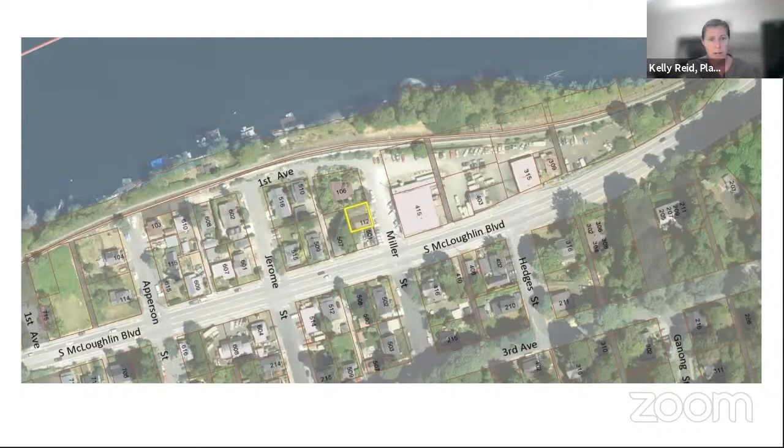112 Miller Street. This is a 5,000 square foot lot. The home plus the detached garage take up almost all of the lot coverage. It's sandwiched in between two other properties on Miller Street, close to Highway 99E. This is an older street view photo, I believe, but it shows the home being in some poor condition as far as the windows, siding, and roof.

My understanding is that the current owners purchased it and are planning to restore and fix it up. Here are a couple other photos. You can kind of see the condition of the home.

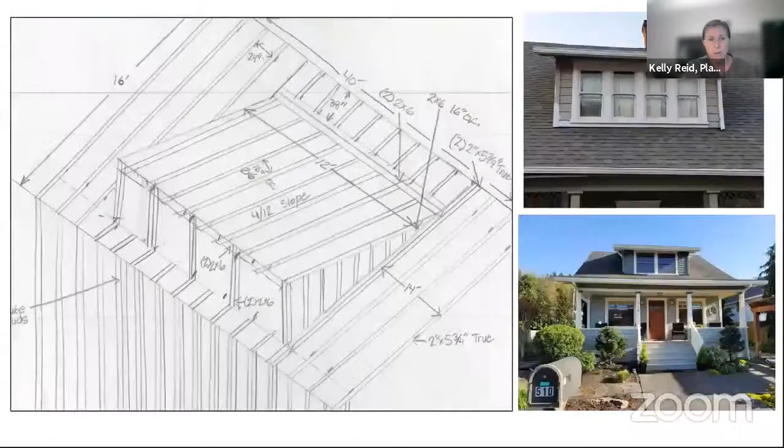The proposal includes restoration of the home, but also adding a dormer, a shed dormer, to the north facing roof. There's a drawing that was submitted, and then two example photos of precedent images of similar dormers that the applicant was hoping to replicate.

So there are a few measurements that I look at as staff to assess whether or not this dormer would be appropriate on this home, whether the design of the dormer is appropriate. Much of it is the dimensions of it, the roof pitch, and the length, distance from the edge of the roof, things like that. So we can go back to this slide as needed to discuss that if the board has any questions.

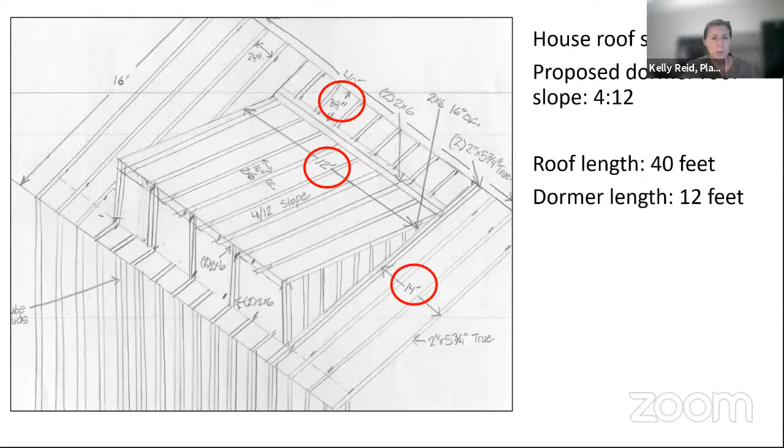This is a bungalow. I'm going to go back to the house photos. The inventory form describes this house as a bungalow. The roof pitch appears to be 6/12.

Many bungalows in Canemah and in Oregon City tend to have a side gable roof, and then on the front gable you typically see a shed dormer on the front gable facing the front. That's what the example images on this page show - those are two homes with a front facing shed dormer. So this is a little bit different for a bungalow, as it would put that shed dormer on the side.

The owner did mention in the application that upon tearing off some of the roof shingles and doing some repair work, it looked like there was evidence that something was there previously. So we don't have any historic photos of the house to show what it used to look like. I think the conjecture was perhaps there was a dormer there at one point, but we don't know.

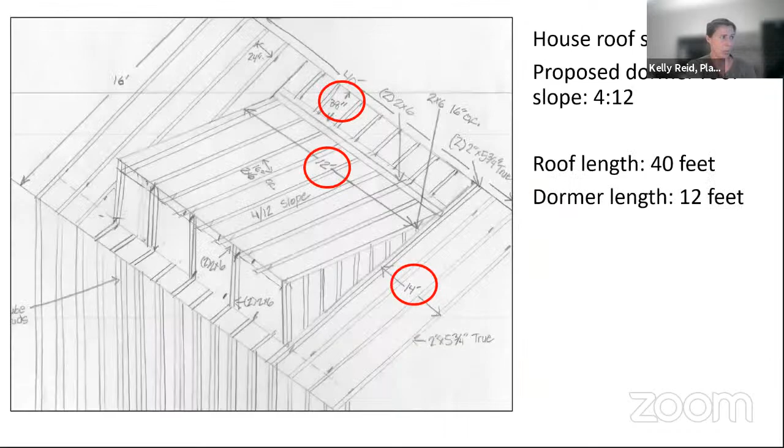Back to the design of the dormer. So it'd be 12 feet wide on the 40-foot long roof, and it would start down about 3 feet from the center ridge or peak of the existing roof on the house. I'm going to go back to one of these photos so it's maybe easier to see.

Can you all see where my mouse is pointing? Yes. Okay, so 3 feet from the roof peak here, that's where the dormer would start. 14 feet in from this edge, measured 14 feet in, it would start there.

I didn't see this at first, I actually asked the applicant over email and included the email correspondence in the agenda packet. It looks like the distance here was 2 feet from the bottom eave, but I can't be totally sure about that. The proposed dormer would have a 4/12 pitch with a bank of 4 windows, and the windows would be about a 2-to-1 proportion, similar to this photo here on top, but about 2 feet wide by 4 feet tall. I'm not sure what the dimensions of these windows are, but that's pretty large for a window in a dormer.

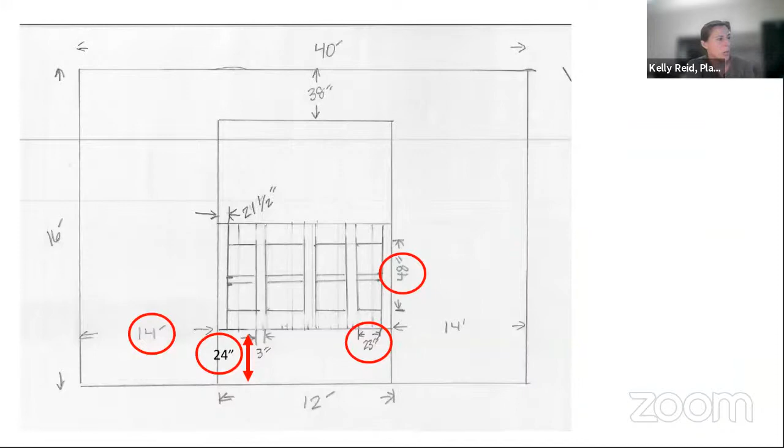Not overly large, but I think larger than a lot of shed dormers. So I added some photos that I was able to find, not from the applicant, of similar side dormers. These examples are a little bit, I think the one on the left here, the house has a similar roof pitch.

It's probably a 6/12, I'm not sure what this pitch is. These windows are, I think, square windows, and so this dormer is a lot shorter, it doesn't stick up as much. This dormer has the rectangular windows. So that is kind of a decent example, but I think this roof pitch is probably an 8.

And a couple of slightly larger shed dormers that are in Oregon City. These are both in the McLoughlin area, but just to show you kind of what it would look like. And of course, this one is on a front facing roof as well, but it is larger, having larger windows in it, just so you can get a sense of what that would look like. And these both have that bank of 4 windows.

I think it would be great to get direction from the board on whether the dormer as proposed has appropriate dimensions for a 6/12 roof pitch. I think that it being centered on the roof and set back 14 feet in, being only 12 feet wide, I think helps a lot to not make it stick out and be too large, and not fit in with the house.

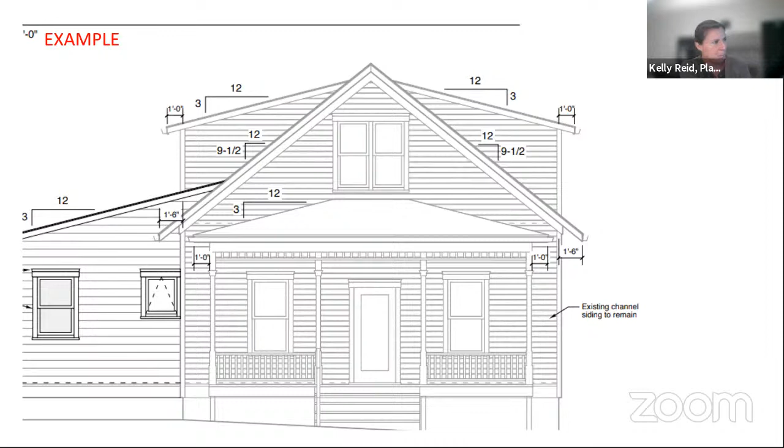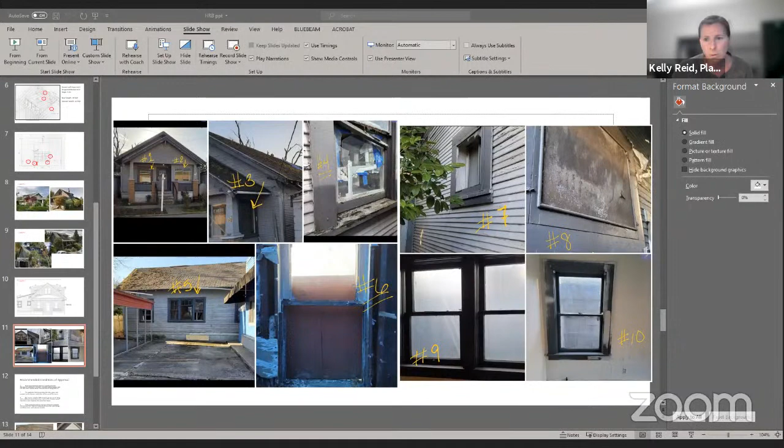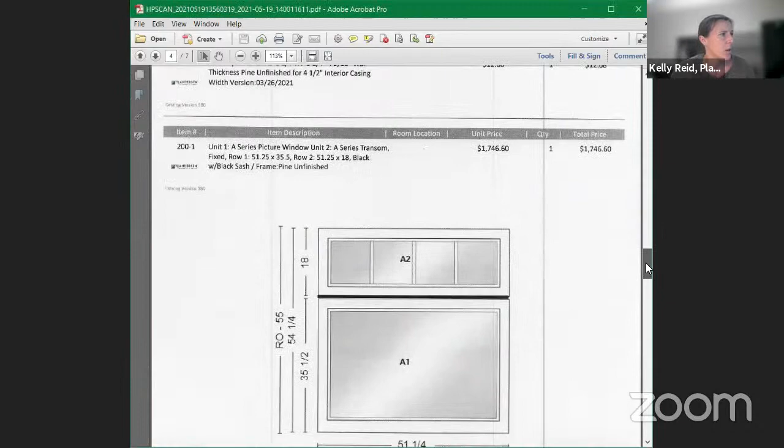Okay, I'm going to stop sharing and pull that up on the screen. I believe this is—I'll let the applicant talk more about it because they're here and can tell us more—but it looks like it does its best to kind of replicate the design.

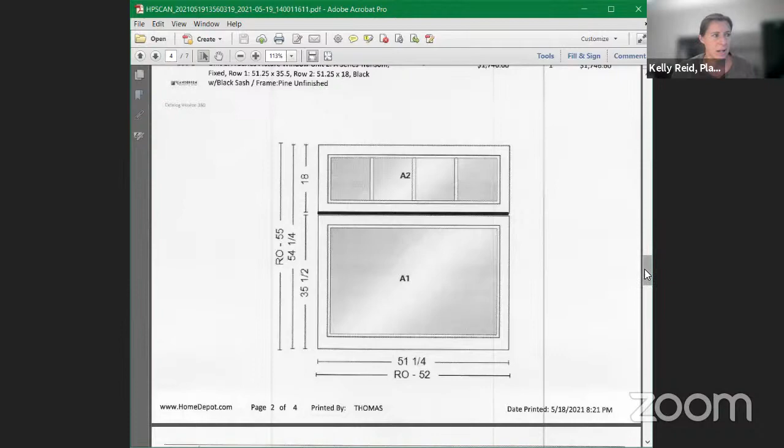I don't think there's a whole lot of detail here to describe exactly how it would replicate the design. So I have a condition of approval recommended to ensure that if these windows are replaced, the replacement windows do in fact match the original design. I'll email it to you so you can scroll through it. During the applicant's presentation, if you want me to show anything on screen in particular, just let me know.

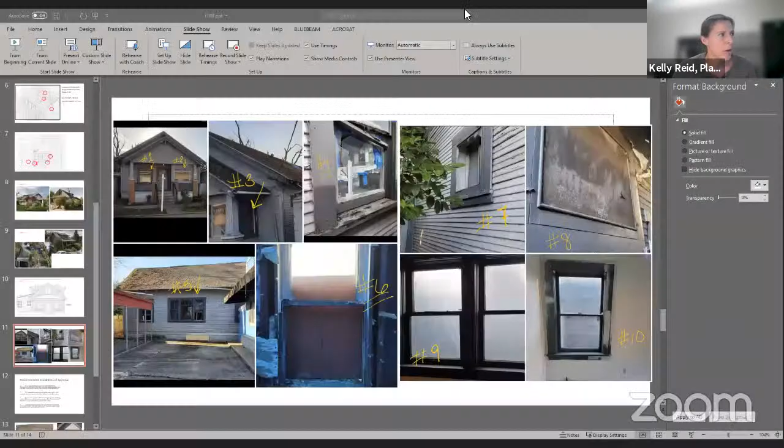So we go back to the PowerPoint. My recommended conditions of approval are, one, that any new wood windows shall use cladding of either fiberglass or aluminum to better resemble painted wood.

And the sash color should be darker than the house siding color. A caveat here: the wood windows, the Andersen 100 series in the application form, when you look it up, appear to be vinyl clad wood, so this would be a change to that. I do believe Andersen makes a product that is fiberglass-aluminum clad.

What I don't know is if that product allows for the sash color to be different from the other parts of the window and the frame. These things can be painted after you buy and install them, but I think it's worth discussing the color issue and whether the products they're using could accomplish that.

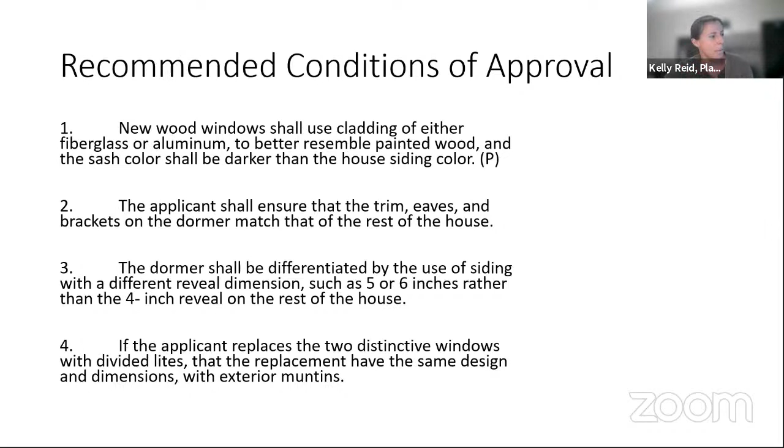These are the images of those two windows. The applicant stated in the application that window number 5 is wood and will not open due to house settling, is now crooked in the rough opening, and will be replaced. Window number 1 will be removed and replaced with a wood clad window to match.

So I'm available for any questions the board might have.

All right. Do any board members have any questions for staff? I don't at the moment. No.

Kelly, you didn't have any, so in the conditions of approval, no further direction on the dimensions of the shed dormer? I think mostly that the shed dormer dimensions are appropriate and compatible. I think it's hard to tell exactly how it will look without a real elevation drawing to scale, or some sort of rendering. It's a little bit hard to tell.

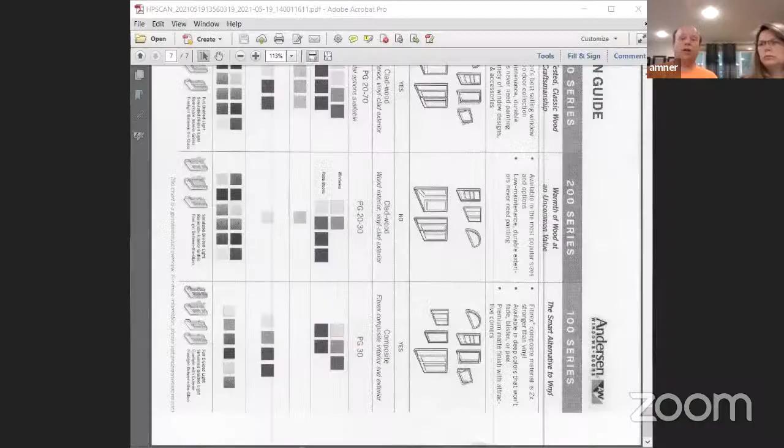But believe me, I would love to do that, because I don't know if Kelly can share the bid for the windows I'm replacing. They follow suit with everything else going on in the world right now, and it's quite the sticker shock, believe me. I would much rather be going the direction of replacing with windows as you're suggesting. Unfortunately I haven't been able to, because that front window is going to be basically $1,000 to get the replacement on it. You multiply that out times how many windows there are. This is not a cheap endeavor that I'm going into here just to try and replace windows.

Well, if we wait longer, then it's more expensive too. Yeah, and the other problem I'm running into is that right now the price of lumber, everything, just escalates so quickly. So they gave me the price of 1,000 and said they're expecting in another month it's going to have another increase. So I'm kind of under that gun, as opposed to just waiting and trying to look around.

If I could go back to the windows, Kelly, can we ensure that the windows have a sill plate and an apron below, and that they match up in exterior design or view of the windows, so that there's enough inset to maintain a similar and compatible appearance to the existing windows that they will be replacing?

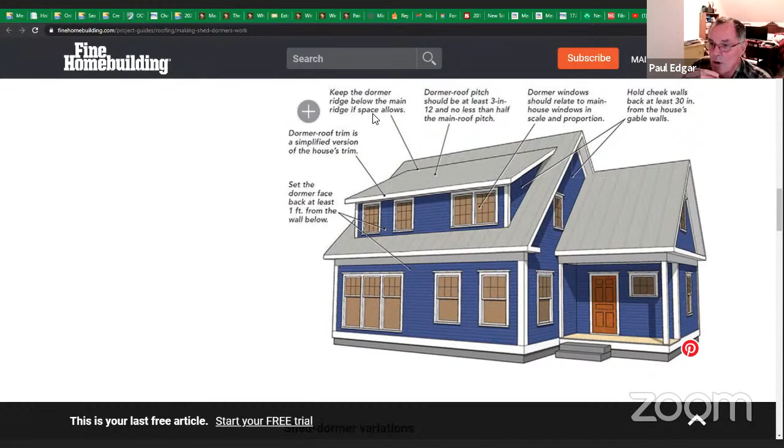No, I accept those. Okay. Paul, do you notice the one he's proposing, is that also going to maintain that the ridge of the dormer is not matching the ridge of the house? I still like it coming off the ridge of the house, I think it's a cleaner line, but I'll go along with whatever the majority says.

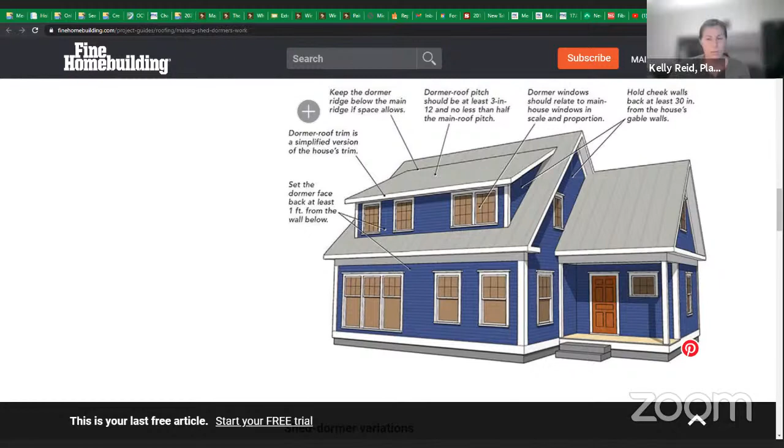All right, in that case, I guess we'll close the record and move. Hey Grant, real quick, do we need to acknowledge the letter from the M&A, from Jesse? I think that was another application. Oh, okay, I'm sorry, that was for 112. Okay, so in that case, we'll close the record and move into board deliberations.

Comments from the board members?

Well, I really want to hope that we could get windows to have this bottom sill plate and apron around these windows, so that they're set back in there to give us a type of look and feel that comes as close as we can get to historic windows.

The windows are oftentimes considered to be the eyes of a historic building, and people make assessments and judgments based upon the design and appearance of windows. Therefore, in historic buildings, they're considered to be one of the more critical elements, and doing them right, if we can, is important.

Tend to agree with that. I think the standard you set with your windows policy is the ideal, but maybe a little too grand of a vision to impose on everyone. But I think trying to replicate the existing trim profile, including the apron and sill, is ideal, so I think we could add something along those lines. Historically, when we're replacing a wood window, we need to step up one step above, because in a remodel that's kind of the goal and the guidelines. So in the case if they were repairing them, we would step back, but when we're replacing a historic wood window, we have a little more obligation to try to be compatible.

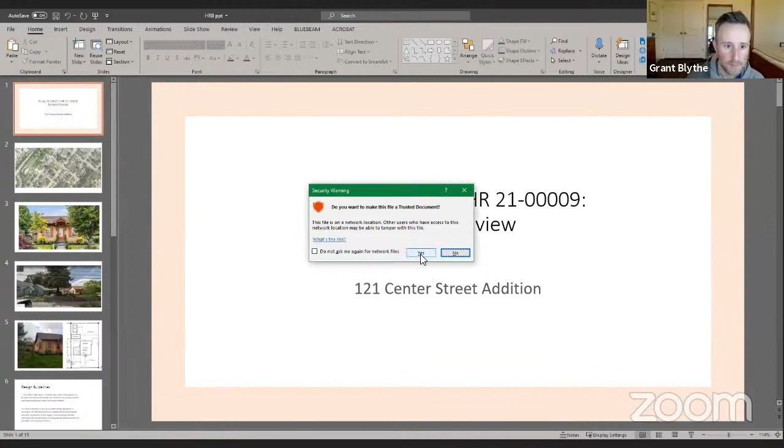So we have a project here that is an addition to a non-contributing structure in the McLaughlin Conservation District at 121 Center Street. As you all know, McLaughlin is made up of about 35% of the structures in the district that are contributing and designated.

This one is not designated, although it was built in the 20s, so it's in kind of the period of significance for McLaughlin. The reason it's not designated is because of alterations that had been made before the district was created. So in the 80s, when the district was created, this home had been altered, and therefore it was, like many homes, not specifically designated.

So we actually don't regulate what this home looks like through the Historic Review Board or through the Historic Overlay, unless an addition of over 30% is being made to the house. In this case, the project is to add 289 square feet, which amounts to 34% of the square footage of the original size of the home. So they're just over that 30% threshold, which puts them in the category of new construction, and it comes to the board.

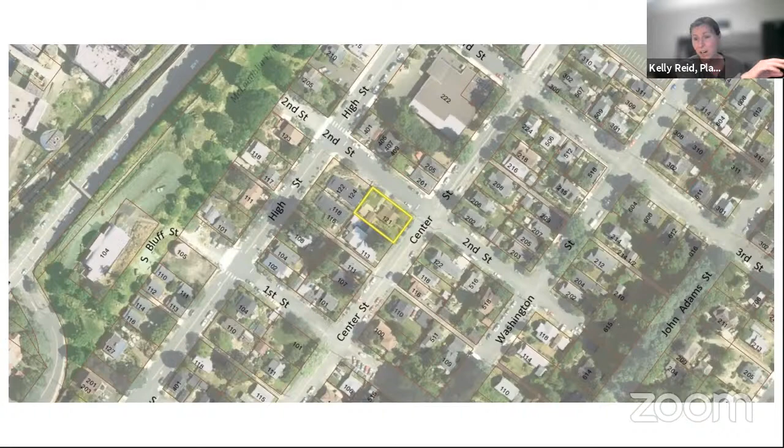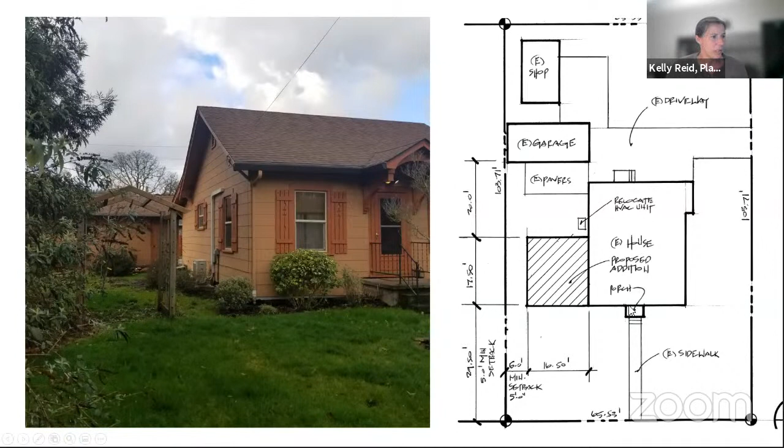The house sits on a slightly larger than typical lot, and it's well spaced from the house next door, well separated, giving lots of space for this kind of addition to be made without getting too close to any other historic resources. So the proposed addition is on the side of the house, continuing the front facade at the same level of the house, but it doesn't run the full length or depth of the existing house.

So the design guidelines — well, I guess before I go there, this is technically in the category of new construction, right, but it's an addition to an existing home. So we have design guidelines for new construction, and then we have design guidelines for alterations and additions to historic structures. Applying the design guidelines for new construction to a project like this is always a little bit awkward.

So the board may want to take that into consideration when making a decision on this. One of the guidelines, as we discussed at the last hearing for additions and alterations, is to differentiate new from old. The design guidelines for new construction don't talk about that at all, because they're written for fully new construction, a brand new house not tied to anything existing.

So I have a suggestion here, and I think the comments we received from the McLoughlin Neighborhood Association kind of speak to that as well. Because applying the new design guidelines for new construction is a little confusing and awkward, I want to point out some language in those guidelines that gives the HRB a lot of flexibility on how you apply them. On page 3 of the document, it says the guidelines describe a safe harbor to allow new construction projects to be approved easily and quickly.

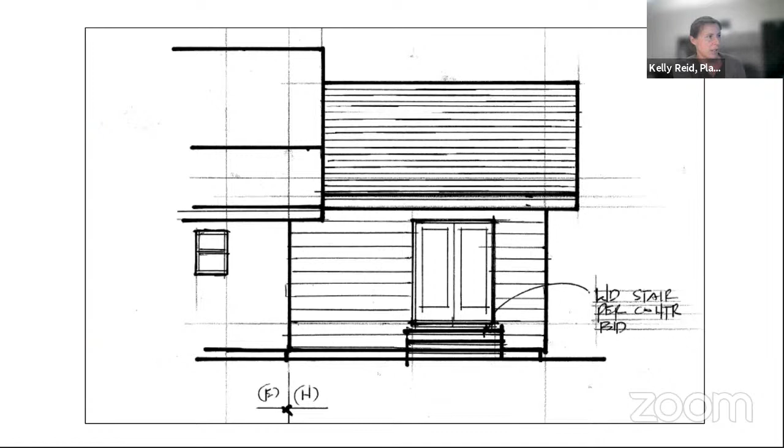And there's a rear door and a small stair on the back. So the existing siding on the home is shown here. You know, as you mentioned, it's not the original siding.

The proposal for the new addition is to try to replicate this. I think the applicant pointed out it's not going to look exactly like it, but it will be close. It's a fiber cement product, shingles with kind of a vertical texture to them, similar to the shingles that are on the house today.

The neighborhood association comments—since these were submitted today, I put them in here just to make sure that everyone has a chance to see them, since they were emailed to you this afternoon. You might not have been able to check that.

So the 2002 resurvey lists the house as historic but not contributing, as we discussed. And the McLoughlin Association suggested a few things.

Massing of the addition must be in a scale that's smaller than the main house. Proposed window should be 1/1 double hung in either fiberglass or wood, with traditional window trim, sill and apron. Rear opening should be a French door. Siding should be traditional lap or, as a last resort, fiber cement.

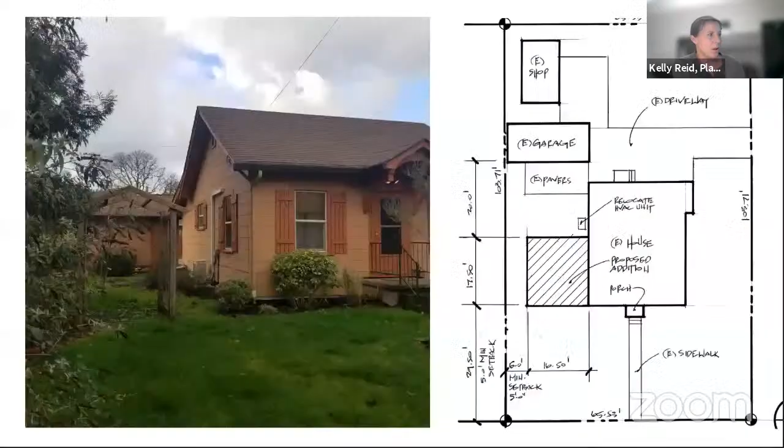These two on the side would be new windows, and they're proposing either vinyl or fiberglass, but ones that resemble the existing windows on the house.

I think HRB direction is needed not only on the shutters, but also on the windows, whether they should match or should be different from what's on the house.

So what the guideline says is that non-wood windows are acceptable if appropriate in style and matching wood in profile, shadow line, and if in suitable color and finish. An actual sample is required to be approved. In this case, the sample is the windows currently on the house that you looked at when you made your site visit.

My recommended conditions of approval, other than wanting your direction on the windows and the shutters, are to add a vertical element where the new addition begins. That could be a gutter, potentially—there might be other things you could use, but a gutter would probably be the simplest, to separate the new from the old.

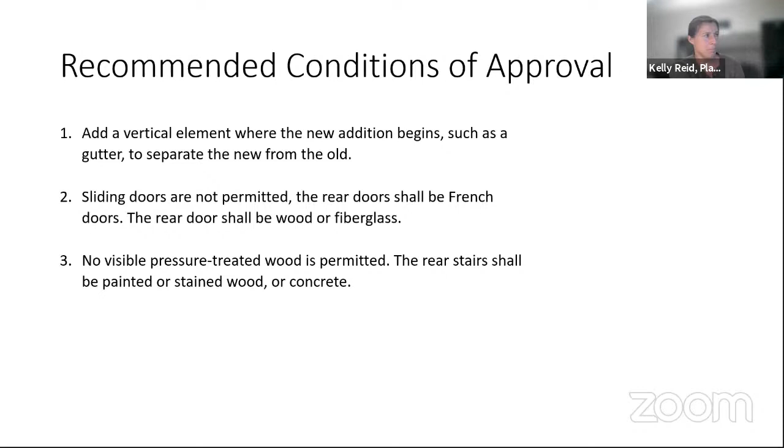Two, that any sliding doors are not permitted. The rear doors should be French doors, made of wood or fiberglass. And that no visible pressure treated wood is permitted. The rear stairs shall be painted or stained wood or concrete. I don't think we got any details on the stairs, which is why that condition's in there.

And I'll go back to the image here. You can see on the front where some sort of vertical element in the condition would be kind of right at this line here that divides the new from the old. So I will stop there and open it up for questions.

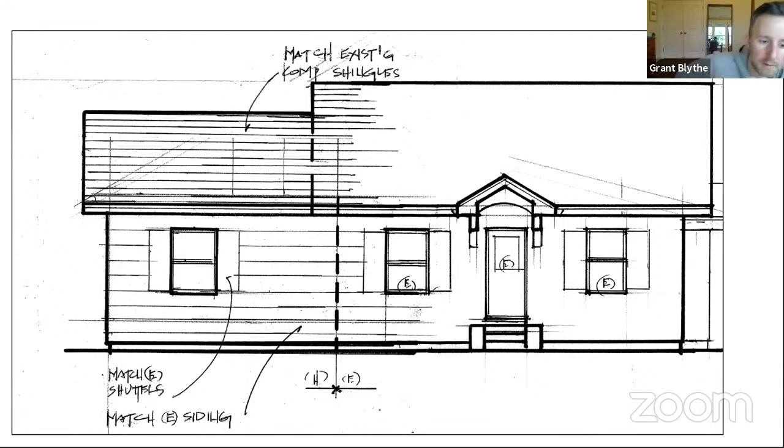All right, any questions for staff before we talk to the applicant? No questions. No question.

All right, then we'll move into public testimony. So the applicant will have up to 15 minutes, though you don't need to use it all, and then 5 minutes for neighborhood association and 3 minutes for any other individuals.

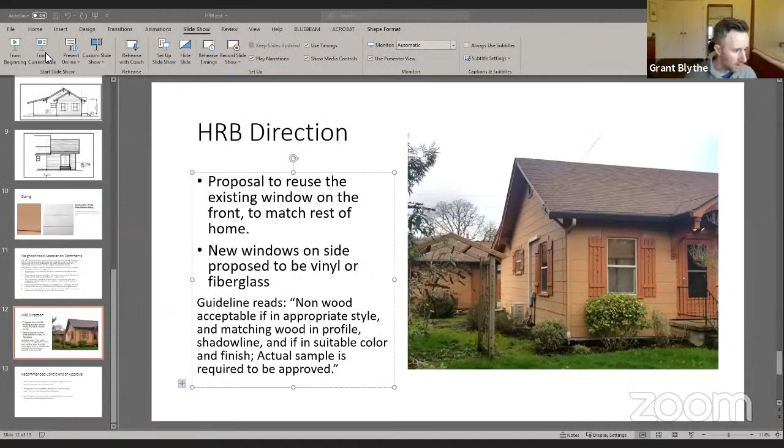Just to the west of where the addition connects to the house. Yeah, the shorter one, that's an existing kitchen window, and that is staying right there.

Okay, and then I think you heard some of the comments that the original siding was underneath. Could you speak to anything you know about the original profile, type of siding, and the condition that it's in?

Matt would have to speak to that, only because I haven't seen that piece. It looks kind of similar to what you see in the neighborhood, that tongue and groove style. But I'll tell you this, it looks like the walls were insulated after construction, because upon removing some of the shingles, I found holes all through the exterior wall where they had pumped insulation right into the wall rather than tearing the walls out, since there's no sheetrock inside the house. It's all plywood on top of tongue and groove.

I also don't know how far, if you're looking at the picture to the west where we'd like to remove the split unit. I'm thinking that addition on the back was added after, and it's probably not the same siding as what's underneath the window or in the area where we're removing or adding the addition, rather. If that made sense.

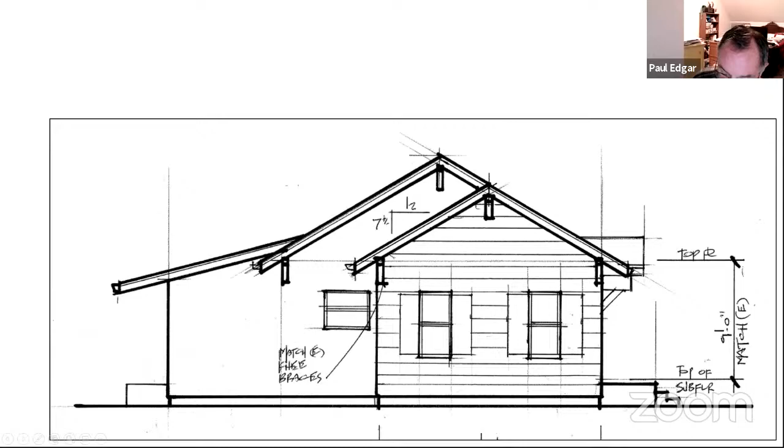I would like to move for approval with conditions, and one of the conditions would be line item 2 of the McLaughlin letter on this, where the proposed window should be a 1-to-1 double hung, either fiberglass or wood, with traditional window trim, a sill or an apron, so that they would match up.

Paul, is that for the new windows, not including the, I guess it's an aluminum window that would move to the front from the side? It's vinyl. The one that they pull out will be moved to the front, and that's based upon doing that.

And just for the record, I would try to, because I haven't touched any of the apron or the casing around the outside there, preserve that and reuse it if possible. But obviously I would match it if something went wrong.

That's helpful. But for future reference, since we've closed the record, we can't have any new testimony. Oh, sorry, can't talk. Sorry, I'll close my mouth. We have to, if we get new testimony from you, then we have to accept testimony from any other party. Fair enough, fair enough, apologies, this process.

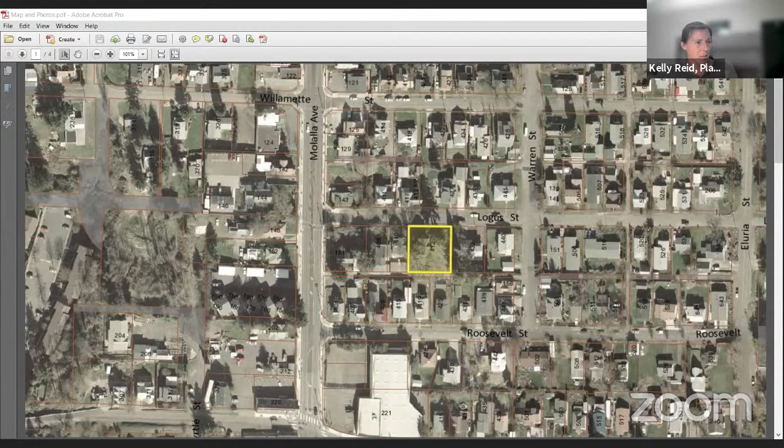There's actually a heritage tree on this property in the backyard behind the house, and there are some other mature trees as well. My understanding is that the owners want to preserve all of the large trees. I think the heritage tree is in the backyard—it's some sort of maple. Northern red oak, it's a red oak.

I don't think I'm going to be part of this. Wait, you can just talk. Yeah, okay.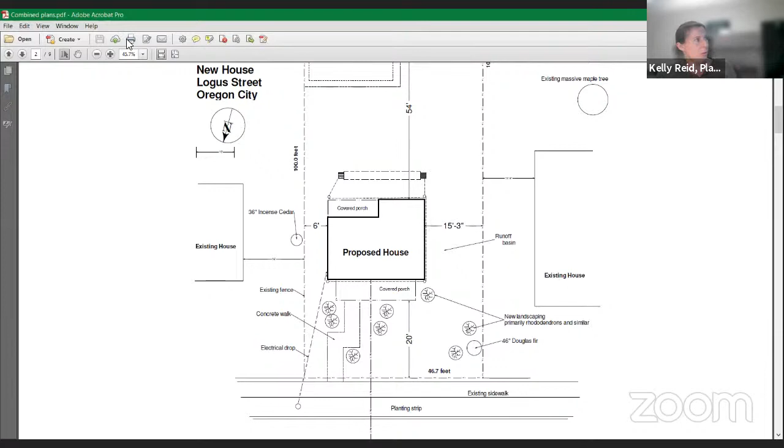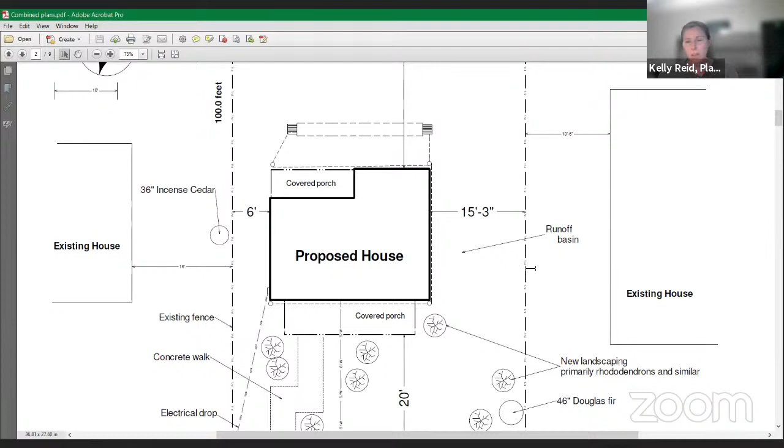So the proposed home is actually a proposed 2-story house, but it's fairly small in square footage. I think the key here is the 15-foot setback from this property line. The existing house appears to be set back 13 feet. Providing a lot of separation is a good thing, letting the historic house have that space around it and preserving its environment. I think the approach here is a really good one.

I'll just add one little thing: the scroll work detail on the front porch is probably something that might be a little too detailed. If we want to keep it simple and make the design not distract from the larger house, the scroll work might be a little too much. But that's just a comment.

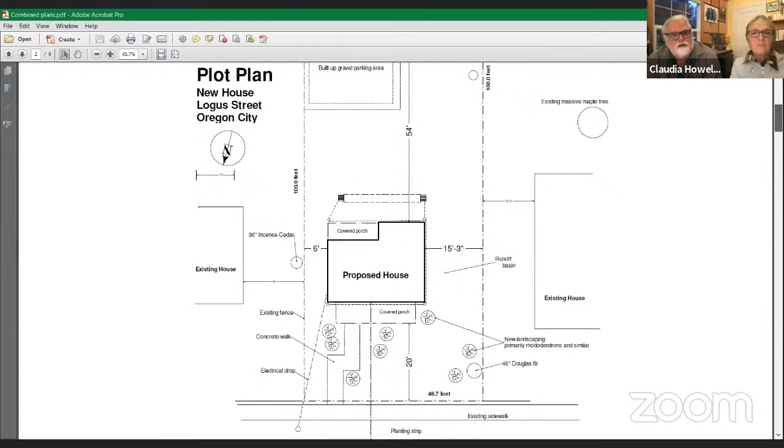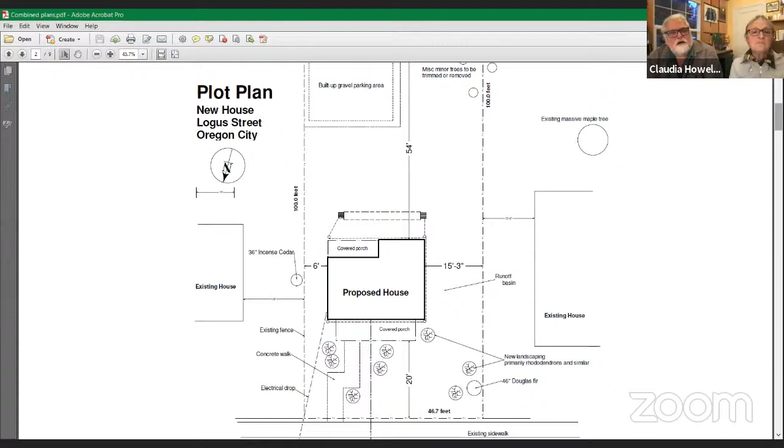We've designed the house so that the ridge is east-west, so the back of the house, the roof on the back of the house, faces due south. Claudia at some point wants to add solar panels, and the design of the house lends itself to that. Again, it's very modest. There's the view from the back. The roof pitch is 5 in 12, in all the roofs, with a small covered porch in the back. What you see there in the corner of that bay window is the dining room, and again it faces due south.

It's meant to be a passive solar feature. It has a total of 5 windows and those 3 skylights. It'll be a wonderful room to be in, absorbing a lot of sun in the winter. With solar panels on the 2nd floor, it should be able to come close to powering the house. Beyond that, it's a 1,000 square foot house. We tried to give deference to the larger, more detailed original house, and I will look forward to your comments.

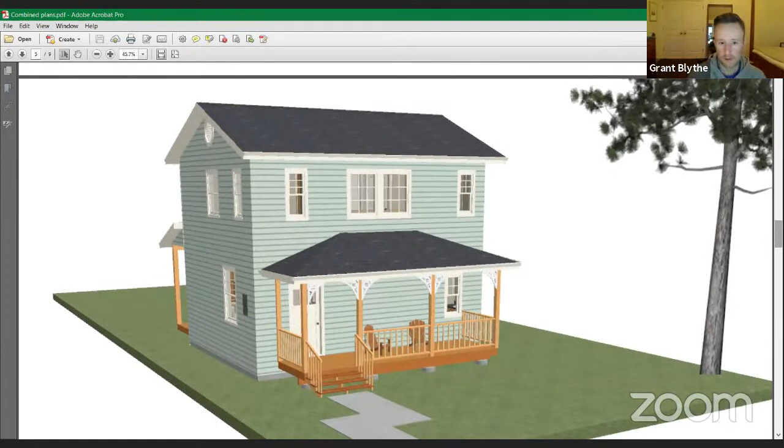Okay, very good. Any board members, if you're ready? Can I see a picture of the porch that's on the original house, the front porch? If we could bring that up.

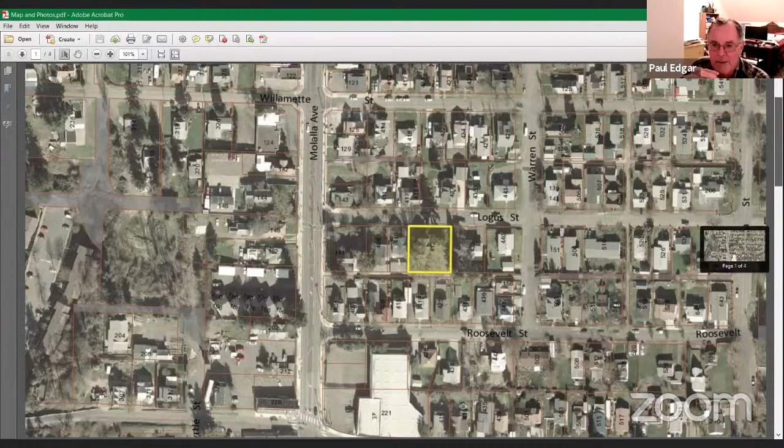I'm just interested in the roof design of the porch, after looking at the roof design on the back of the house. I'm just... it's cantilevered, sort of in there. It extends over the porch. The whole house does.

That's slightly difficult to do structurally nowadays. Shear transfer and so forth becomes problematic in that. And frankly, Claudia doesn't want the room, I mean, she doesn't.

This is backwards to what you normally see. She wants a small house. Probably what you're used to seeing is people want big houses. No, I was just trying...

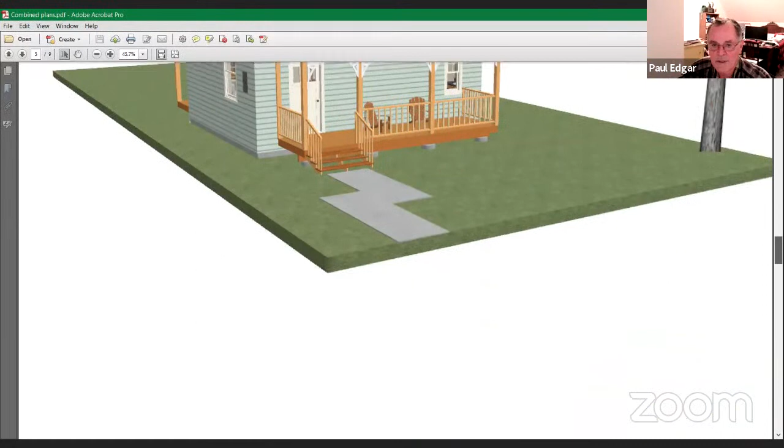If on the back of the house you have a flat one without hips on it, I was trying to think if on the front of the house, if that was without hips, how it would look, kind of matching up the front roof design to the back roof design over the front porch. Well, I think the front porch with the hips is more historically appropriate, more accurate. Yeah, see, it's held in from the side a couple of feet.

There's some deference—you'll never see the roof in the back from the street. There is an alleyway behind this, but once fences and landscaping are in, with the house to the left and so forth, you'll never see both elevations from the street. So I think both elevations are somewhat isolated. They need to relate, of course, but they don't have to be the same elevation because you can't see them both.

The back of the house is somewhat more modern. It's trying to take advantage of the sun, solar access, and so on. The front of the house is much more in keeping with the historic neighborhood, the historic character.

I have a question about that, because this is very folk Victorian to me. The original house is more of a craftsman house, so why did you decide to go with a completely different historical style? It matches the rest of the neighborhood, I guess. And I lived in a house that looked very similar to this. To be quite honest, that was it.

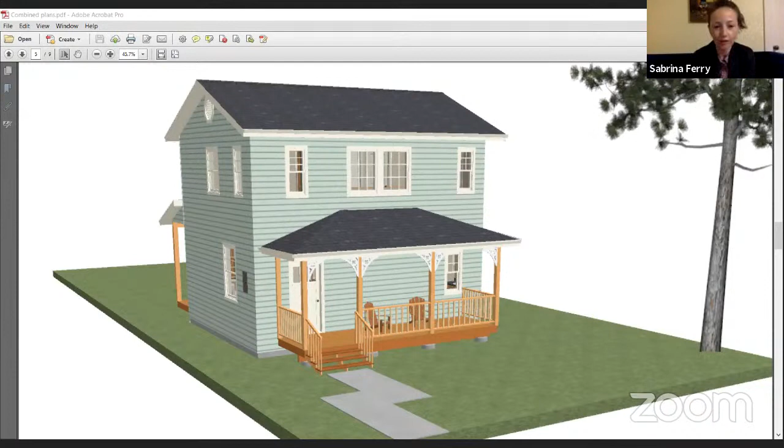Apologies. I'll lend the floor to anybody else. I need to switch places with my children, so I'm going to need to go downstairs. Hang on one second—good luck with that.

I guess one question I had was about the pitch of the main roof—it's probably a little bit flatter than what most of our design guidelines would call for. It's easily changed; the 5-and-12 works best for the solar panels, but 6-and-12 or 8-and-12 would simply work too. It's a minor change. I tried to keep the roof low so it's not a major feature of the facade. Making it a steeper roof makes it much more of a focal point of what you see.

Though this doesn't really give a very good representation of what you'll see, because the lot has a slight slope to it. So you'd actually have eye level probably at the top of the rail when you're on the sidewalk, in the street. The eye level would probably be the top of the rail, so you'd be looking up at it slightly. Having the lower roof de-emphasizes that from the view from the street.

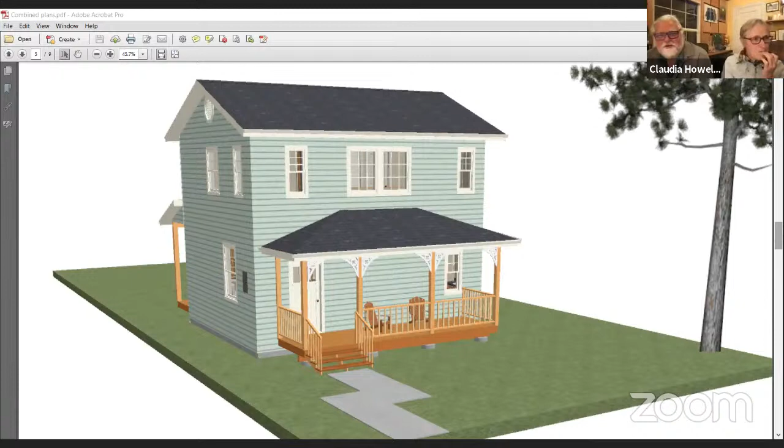Eventually we'll put on an attractive door. I had to generate these plans quickly, and I didn't concentrate on the door, but an attractive, age-appropriate door will eventually go in, something that's welcoming. It's not meant to be a metal door with a big keep out sign on it. I don't think that would be historically significant, historically accurate.

Yeah, again, it's what the program offers. It offers a tremendous amount, but it takes time to put it all together. And one Friday, I was told that if we get this in by Monday, we can get on the study session for the 22nd or for the 25th. So this design and all of its detailing was generated over a weekend.

I think you did a great job on the overall massing design, the placement on the site relative to the trees, the historic home. I think you nailed all that, and then we'll be looking for some of those final details to be refined in the final application, and go from there.

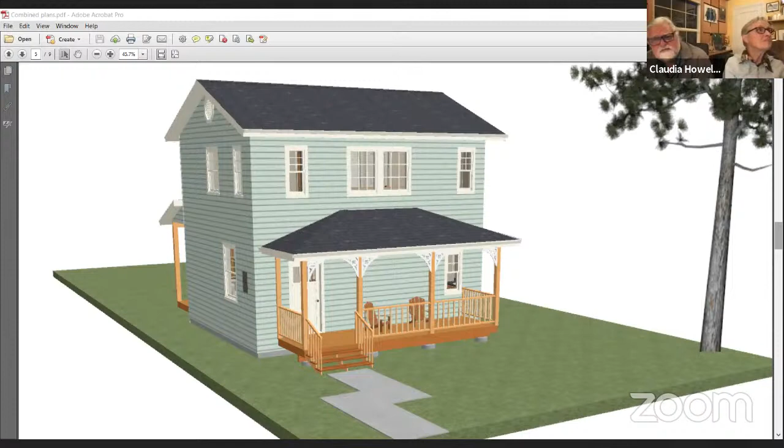Yeah, I guess I have to ask — Claudia told me not to — about the roof pitch. I've got it at 5 and 12, and that was mostly driven by solar access. Should it be higher? Is there a consensus on that? I don't see any reason why it would need to be.

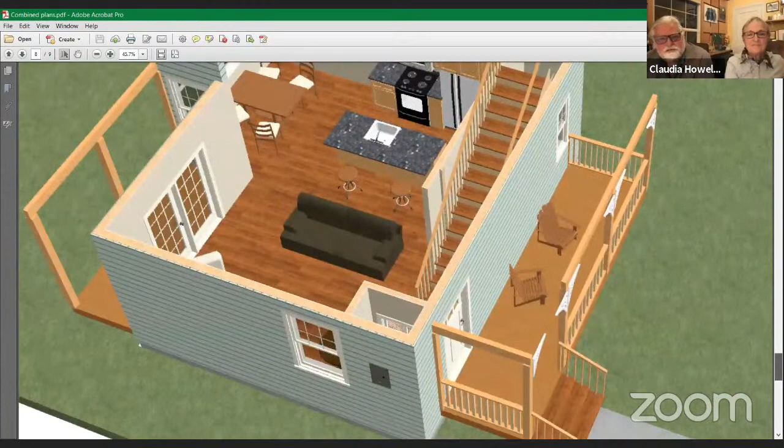I personally like a little steeper pitch, but your logic on compatibility for solar mitigates that. I'm from California, and for the last 10 years we've had to design specifically for solar access. So it's something I've been trained on. I'm sure that's coming to Oregon soon, but in California, all new houses have to specifically address how you're going to put solar panels on the roof and how to make them as efficient as you can. So that's been my training for a number of years.

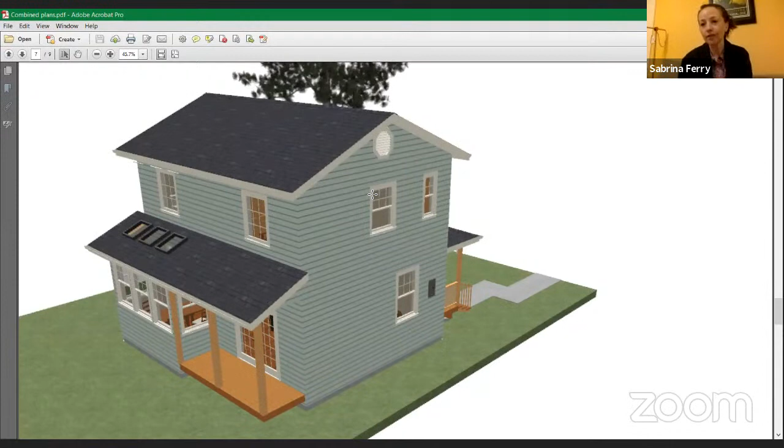I actually like the lower pitch specifically because it differentiates it from an actual historical home. I feel like sometimes when you're trying to work within a style, you need to take details and portions of it, but you also need to make sure somebody doesn't drive by and say, oh look at that old house, they changed the siding. You know what I mean? Yeah. We tried to use the vocabulary of the neighborhood with an attractive, modest house that is an asset to the neighborhood.

I think I would just make sure you lay out the reasoning in the application, because that's something we get public comments on a lot. The design guidelines, depending on which style you applied here, would probably say something like not less than 8 and 12. So anytime you deviate from that, we need to explain.

And no vinyl windows, please. How come? It's in our code — we try not to look at vinyl windows. We look at fiberglass or something that's paintable, as more design compatible.

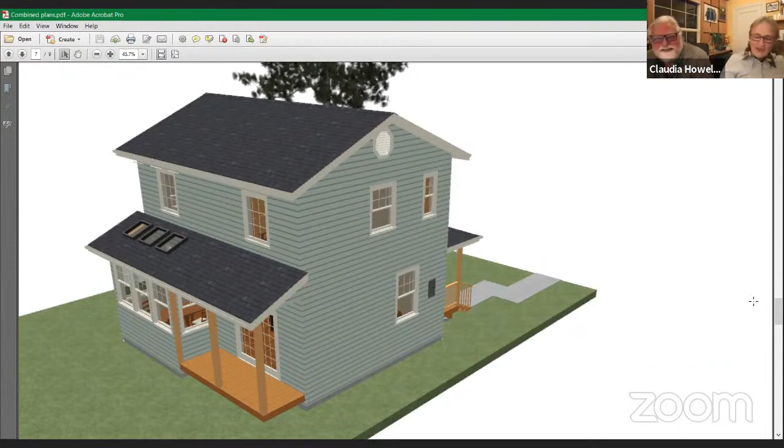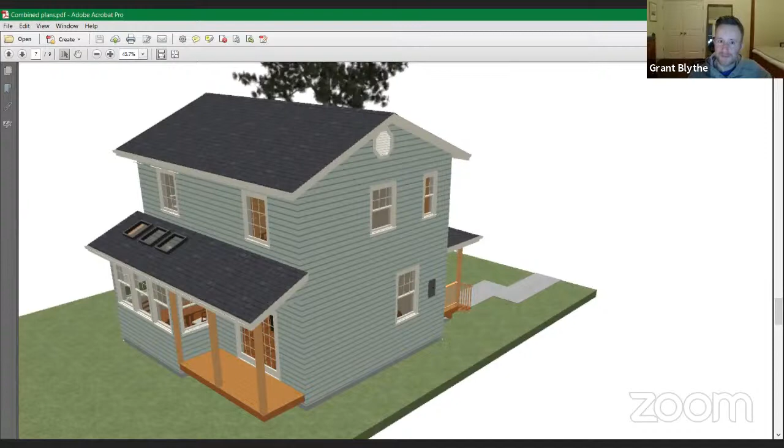But you can replace the plastic windows in 30 years with something else. Yeah, but by that time they will have yellowed. I mean, you can replace the aluminum windows in 25 years with plastic, and then replace the plastic windows... sorry, my client told me to shut up, so I will. I hope you took it as humor. Oh yes. Okay, any other comments or questions?

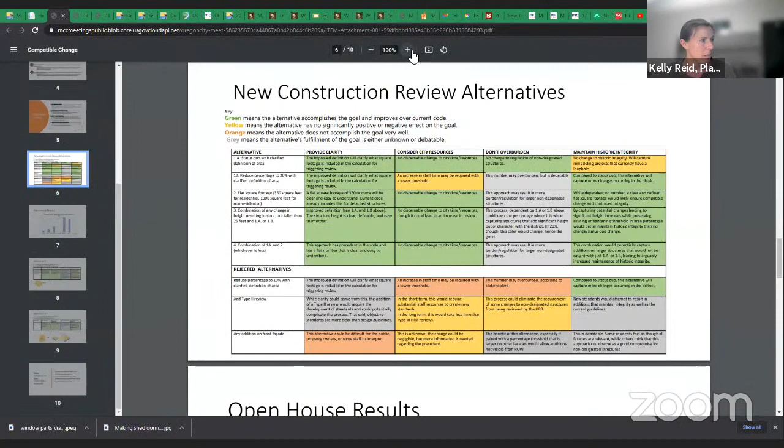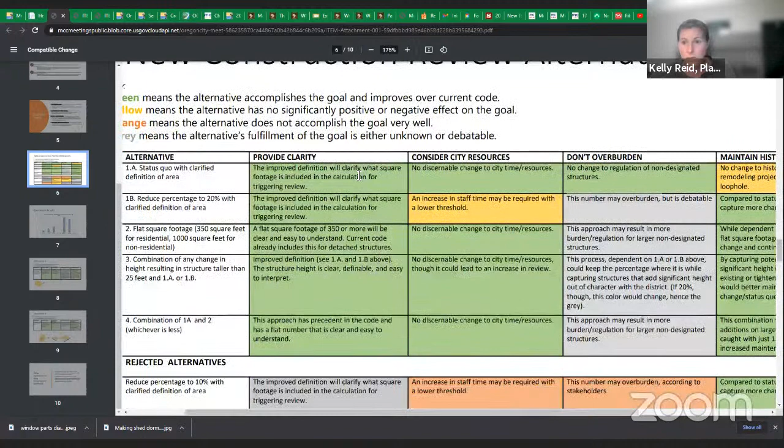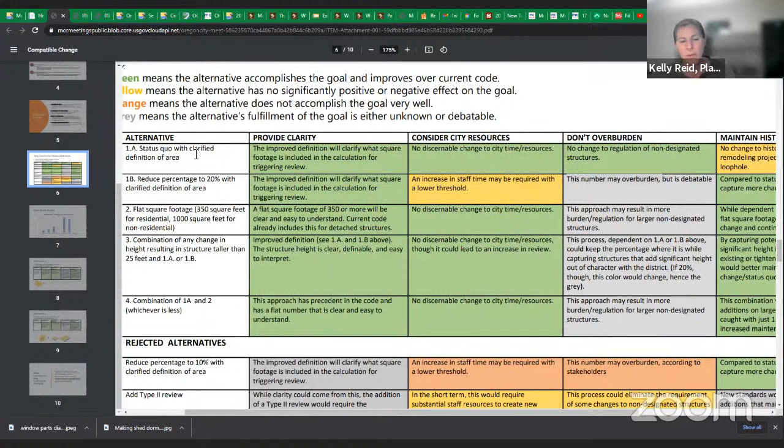But anyway, that being said, I will share this screen and talk to you about the different alternatives that we looked at. So the first one is keeping the current code in place of the 30% threshold and clarifying what we mean by gross floor area. And that would really not change much.

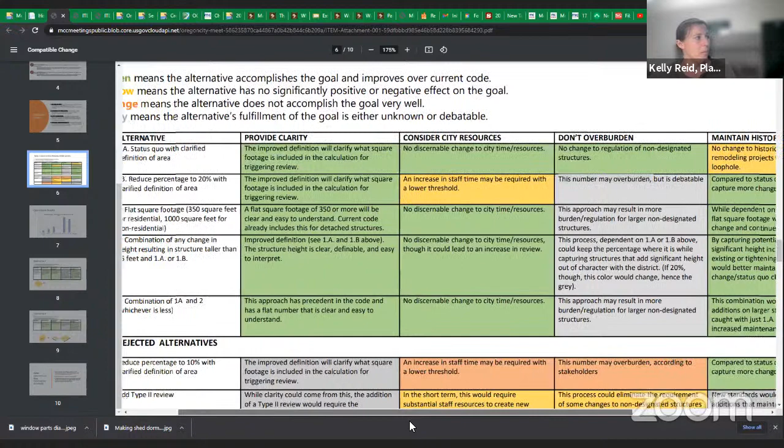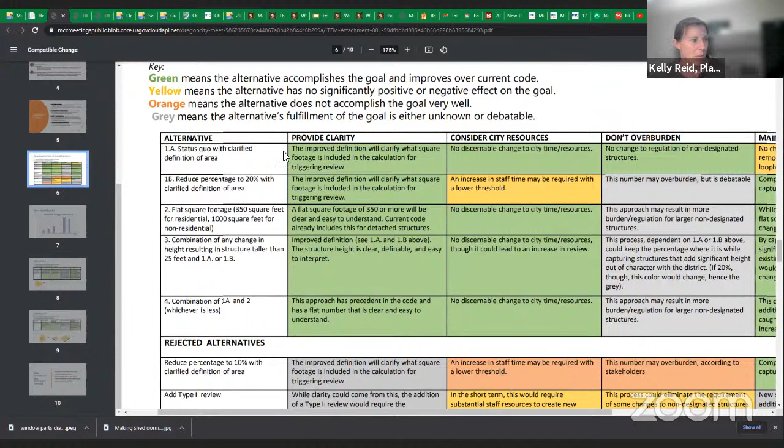The second one was to reduce that 30% to 20%. That might lead to a few more projects being triggered for historic review, so it would increase your workload and staff's workload, but it might lead to more compatibility, because you would be capturing more projects.

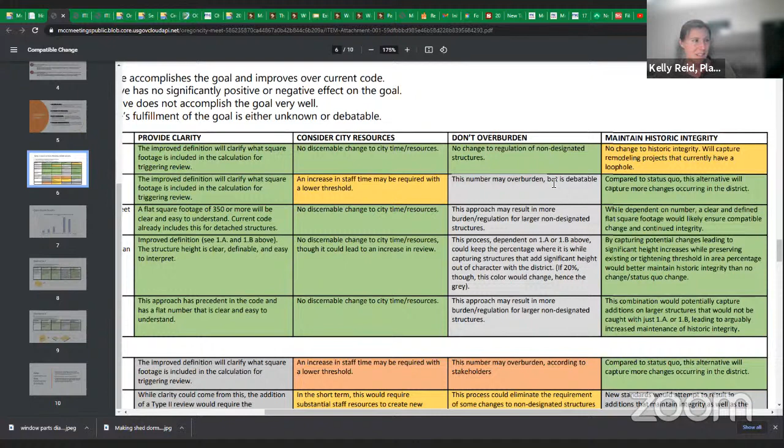I think one of our decision criteria or goals of the project was to not overburden property owners - people who bought their property knowing it's not a designated property and that they would have flexibility and wouldn't necessarily have to come to the board if they wanted to build an addition. If we vastly or greatly reduce the threshold, that could eat into that expectation or our goal of respecting the non-designated status of those structures.

So number two is to, instead of using a percentage, use a flat square footage - for example, 350 square feet, or for a commercial space, maybe 1,000 square feet. That is going to be really straightforward for everyone to use, but it would also not necessarily be as equitable. It depends on how you look at that.

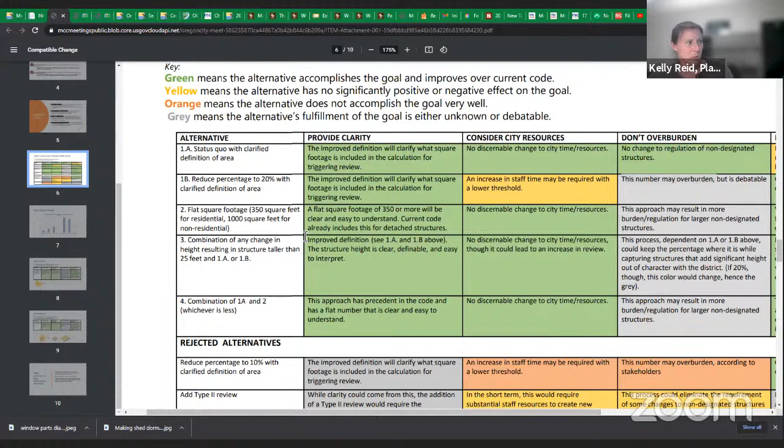So for a smaller home, that would give them more flexibility for adding square footage. For a larger home, 350 is probably going to be less than 30%. That likely would not have a huge effect on the amount of staff time or HRB time that is taken up reviewing these projects.

And the reason is, considering city resources is one of the project goals - I think we want to just make sure that if we do change our code and it results in a huge increase in the number of applications that would come our way, that we have to really understand that. Currently we don't have a budget to increase our staffing.

So the third alternative was to combine the percentage with a change in height. So if an addition results in a change in height to make a structure taller than 25 feet, no matter if that addition is like 50 square feet or 500, that would come to the board. That's a little bit more complicated for people to understand and for us to catch and measure. But I think we did hear from folks that they kind of liked this height idea.

It's just a matter of, do we want to make it any change in height, or what's the right number if we're going to put a number on it.

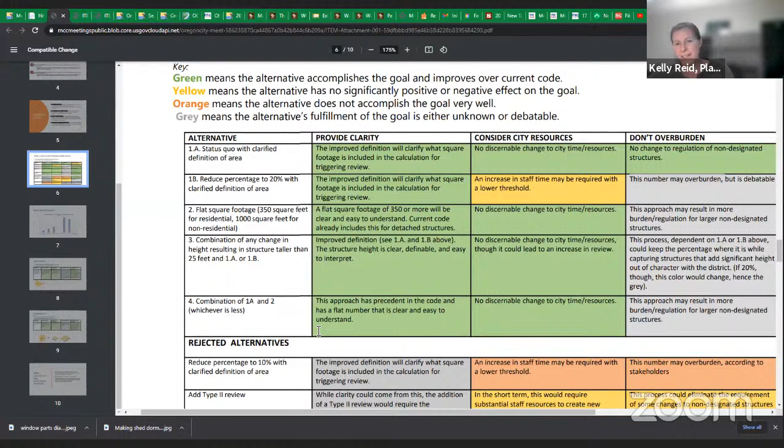So that was kind of the tricky part of that one. And then the fourth option was combining—sorry, I'm looking sideways because I have two screens going on—a combination of 1 and 2, where you say 30% or 350 square feet, whichever is less. And that exact number, maybe it's not 350, maybe it's something else.

But that was alternative 4. So the other ones that we considered but rejected were to reduce the threshold percentage to 10%. That just seemed too low, and it almost resulted in us treating non-designated structures the same way that we treat designated structures.

And we want to avoid that for legal reasons and all of that. Another one is to add a type 2 review. That would mean that for these non-designated structures, they could just go through a staff level review process that would require us to write some clear and objective standards for what those additions look like. And then I would just write a staff report, and that would be appealable, but it would not come to the board. So that wouldn't save that much time.

Knowing how our guidelines are tricky already, to write standards would be a lot of hard work. And it would probably be controversial.

Adding additions to the front only and reviewing just those that are on the front—that was rejected. One, because all sides of the structure matter, according to some folks that we talked to, and because it's kind of open to interpretation of what's the front. If you're adding something on the side, like the one we saw today, what if it's set back from the front a little bit? Is that still front? So it's going to be harder to define.

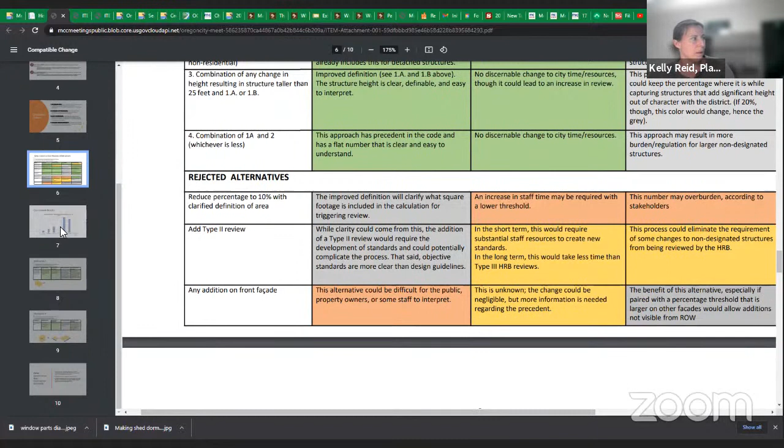And so those three alternatives were rejected. The results of our open house and survey were that alternative 3, the one that referred to height, and alternative 4 that combined the percentage and the flat square footage, were the most popular.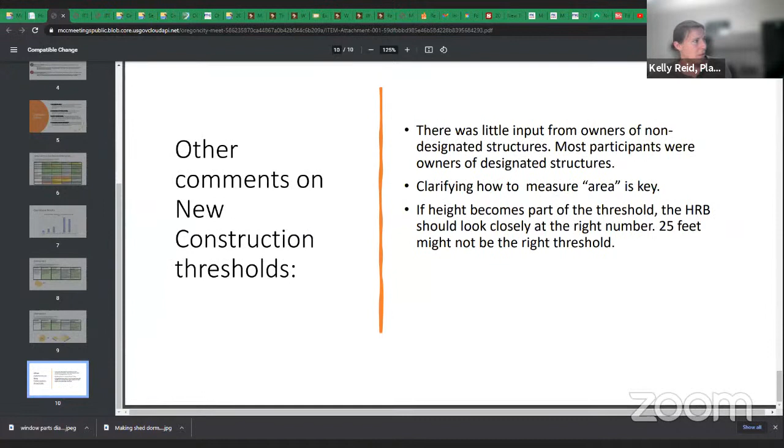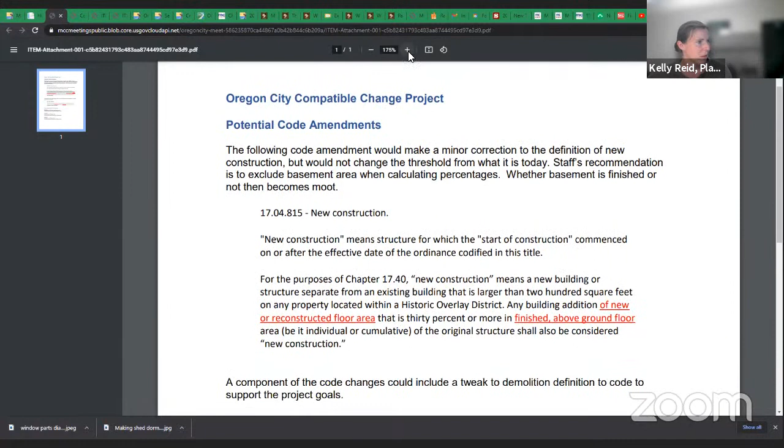I'm going to pull up my recommendation now—or sorry, not the recommendation, but the potential code language that we can discuss. So I'm not recommending any particular of those alternatives to you right now, but I've just pulled up some language that could help us better define area. You guys seeing this text here? Okay, sorry, it took me a minute—you probably saw me clicking around trying to find it.

So the new construction—I think the red line language is what would be added—would be clarified to say any building addition of new or reconstructed floor area, meaning if you take off the attic space and then rebuild it back, that's reconstructed. So we're not looking at cumulative change, we're looking at just, after you do your demo, what's the new square footage, that's 30% or more in finished above-ground floor area. So somebody's basement being finished or not finished isn't going to affect this calculation. And attached garage space, something like that, would not count either. We're talking just about finished, heated, above-ground floor area for our denominator.

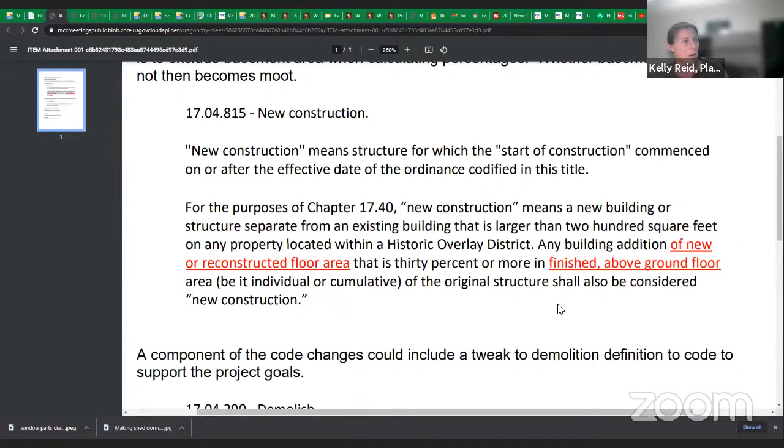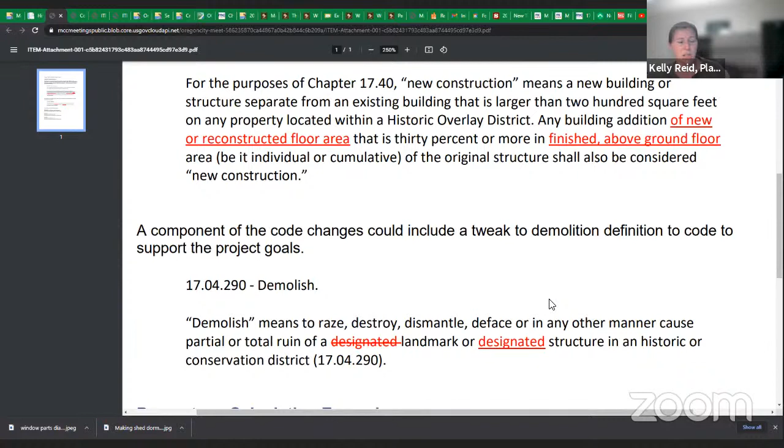So that's our suggested language to clarify that. This code change could be as simple as just adding this language or modifying this definition in this way. Or it could be a more substantive change where we go with one of those alternatives that's been suggested, or one of the other alternatives, which is the status quo.

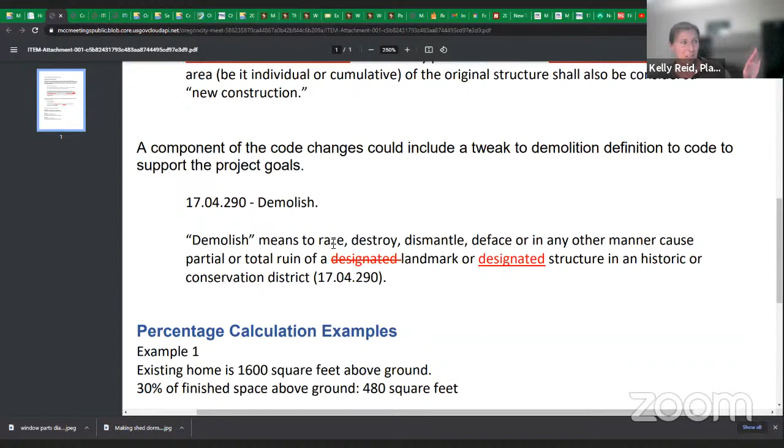There's also a component of the definition of demolish, and this is really just clarifying—it doesn't change anything. It's just to clarify that demolition review only occurs when they're demolishing a designated structure. So we don't review demolitions of non-designated structures, but the language is a little confusing and can be interpreted either way. So this would clear up that issue.

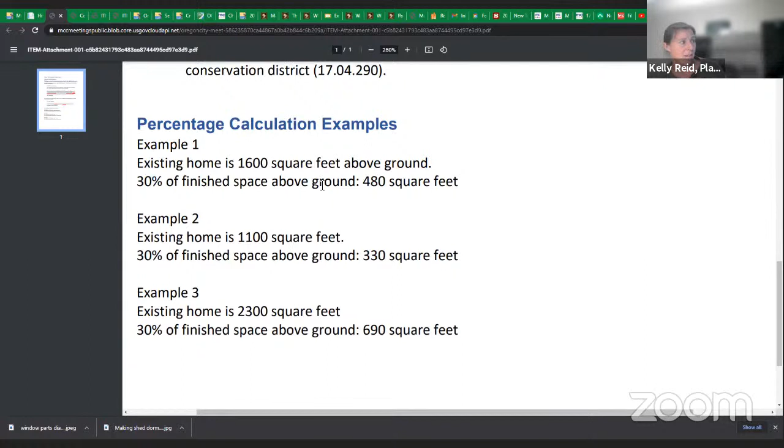And then just to give you some simple examples of the 30%, here's some—if you can read those—just some different sizes and what that would mean.

So I'm really just looking for any thoughts from you, and direction for me as far as developing any sort of new code language other than what I showed you, or if you have any comments on the code language that I just showed you.

Kelly, I think you said last time that this was brought about because of something that happened that was unfavorable to the district, the McLoughlin district. Is that right? So are we trying to catch more before it happens?

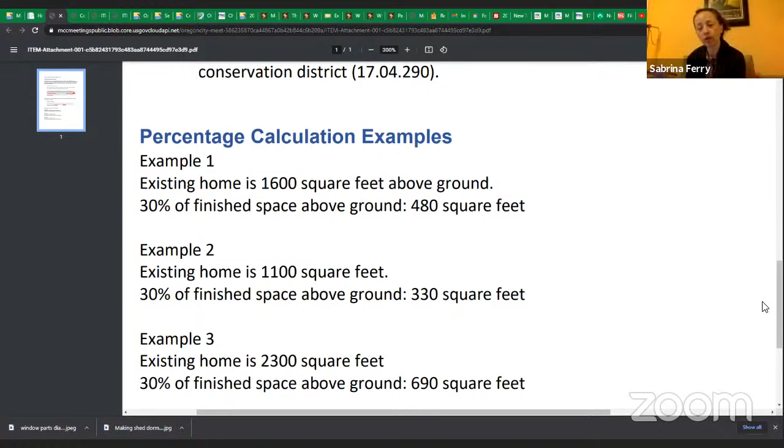Yeah, so this reworded definition here with the reconstructed part, that would take care of the issue that happened last year, or two years ago, in McLoughlin. Almost the entire home was remodeled, but in reality it was pulled down almost completely with just one wall standing, and then reconstructed with a much larger second story than what was originally there. It was kind of like a half story or a finished attic, and then it became a whole new tall second story. When you compared the old square footage to the new, the additional square footage was only 19%, but the effect of the work made the house look twice as big. Whether or not the design was okay wasn't necessarily the question—it was just like, whoa, that house looks like it doubled in size. Why did this not come to the board?

I see, so this language here would probably take care of that. I think while we were looking at it, we kind of wondered if we're even going about this the right way by using this percentage. So that's why we asked the community what they thought, and we also did some research on other jurisdictions. That's where we pulled some of our alternatives, because other jurisdictions don't necessarily use a percentage either—they use a flat square footage in some cases, or various other things.

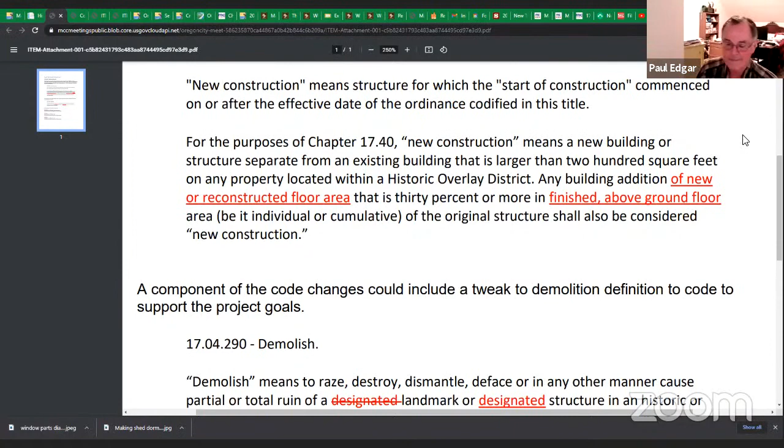I would love to see this put off to a later date and have more time to think about it. I think I agree—it's been very helpful to hear what other board members think about it, and to have increased information from you, Kelly, just being able to talk about it.

What do you think, Grant? Yeah, I'm okay with deferring it a bit. I think Ray and I have probably heard it more than the other two of you, since we were around when it all kind of kicked off, a little more deeply involved.

Oh, so this has been going on for a while? Yeah, the original project started, I don't know how long back, maybe a year ago, or late '19 or early '20. I see, so you guys have already had conversations about this? Yeah, apologies, I didn't know.

But I don't think there's any imminent pressure to wrap it up either. If you want to take another month to review the materials, we can make a recommendation at the next meeting. I would like that.

Yes. And I think there's a whole packet of other stuff—I did one of the interviews with the intern, and there's research and opinions that are deeper than just the final presentation in tonight's agenda. I could send all that off to you later this week since it's already public information and has been on our agendas before. I'll email it to you individually so you have it at your fingertips and can look it over at your leisure for the whole month. That would be great, thank you.